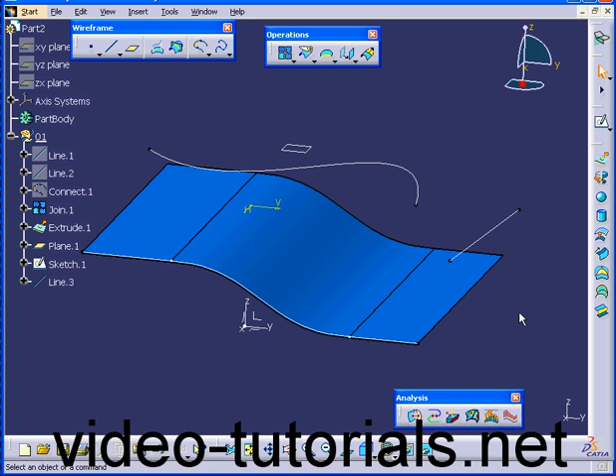Welcome to our tutorial on the projection command. Let's start by activating the projection command and exploring its definition dialog window. Under projection type, we've got two options, normal and along a direction.

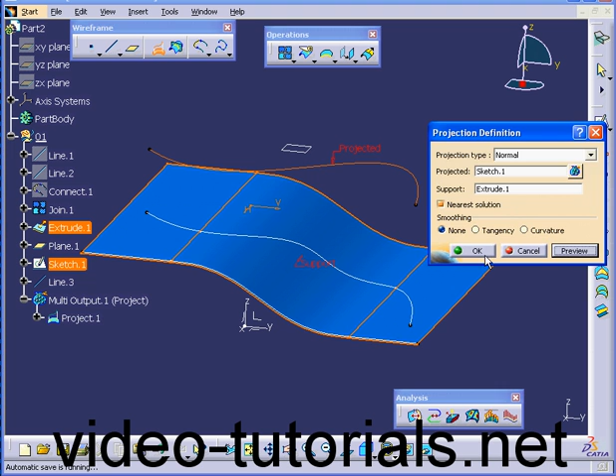Let's select normal. In the projected selection box, we're going to select this curve. Under support, let's select this surface. Click Preview and OK. Now let's run the Curve Connect checker.

Let's start from the original curve. As you see, we have no problems with either tangency or curvature. Basically, it's a single continuous line.

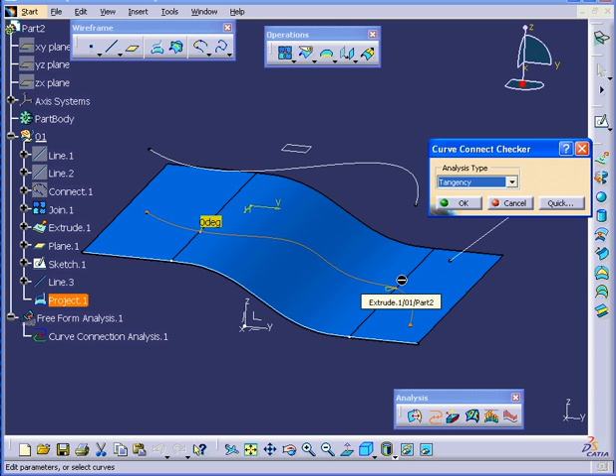But if I select the projected line we just created, we obviously have some problems here. The curvature discontinuity is 51% at this point. The tangency seems to be okay. Let's cancel out of the Curve Connect checker.

Let's double-click on Project.1. In the smoothing definition area, we've got three options: none, tangency, and curvature. Let's select curvature. Deviation we'll leave at the 0.001 and click OK.

Let's run the analysis again. Curvature first. Select our curve. Both look good now. Tangency as well looks good. Let's see, perhaps we can enhance our spline even more.

Let's check the 3D smoothing option this time. This type of smoothing is calculated without specifying any particular surfaces. Let's click OK. And then run the Curve Connect checker analysis.

I'm going to select this line. As you see, we now have one continuous line. Let's cancel out of our Curve Connect checker analysis. The smoothing option doesn't always work. You actually need to have pretty smooth surfaces to begin with.

I'm going to run another analysis. I'll select this surface. You see here, the surface is actually quite smooth to begin with. Let's cancel out of this analysis for now. Let's make some changes. Double-click on Connect.1.

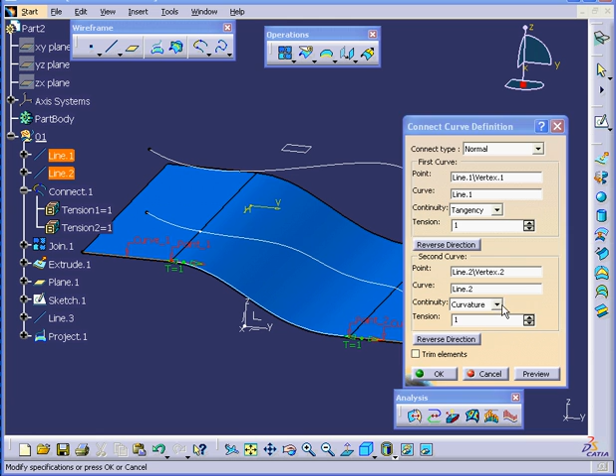You see that between this point and this point, we have curvature continuity. I'm going to change this to tangency and click OK. Now let's run the porcupine curvature analysis on this surface again. You can see that we don't have smooth transitions here or here.

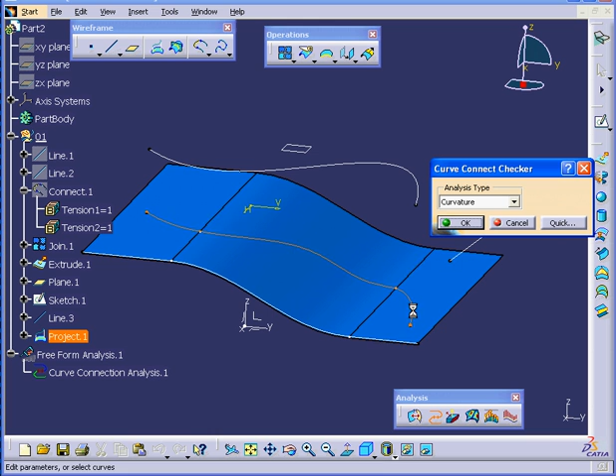Let's go check how our line is doing. Select the curve. Surely enough, we have some problems now with curvature continuity as well as with the tangency.

There's two points that I'm trying to illustrate here. Our example shows that continuity can be lost during the projection process. Let's cancel out of the Curve Connect checker for now.

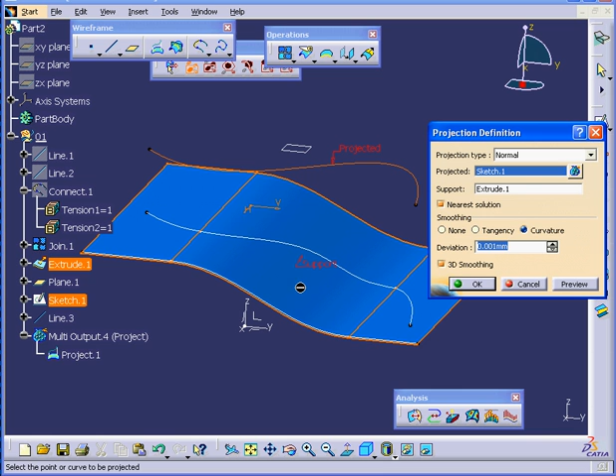When we implement the smoothing function, it doesn't always correct the problem. Basically, the underlying or support surface needs to be smooth to start with. Let's click OK. And this concludes our tutorial on the projection tool.